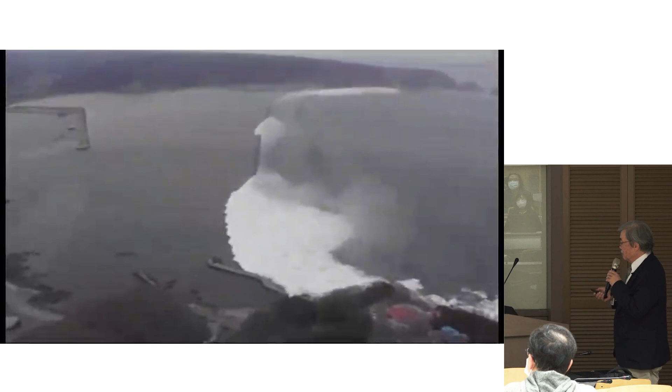This short video was cut from a much longer original, taken during the 2011 tsunami in Japan, in the Bay of Kuji, showing again that the leading wave of the tsunami looks just like a bore, like the Qiantang River bore propagating, with a very, very long crest. Practically it looks like one uniform long crest, and it's obviously breaking because you see air bubbles trailing behind the wave front.

And I think the video will stop pretty soon. The length of this bore is very, very long, extending a few kilometers, extending across the whole bay. Another thing I should point out is the breakwater, which is protecting the harbor behind it.

The height of the seawall typically would be 5 to 10 meters—I don't remember exactly what the height of this particular one is—and overtopping can be clearly seen here. So that gives you some estimation of the height of this wave as it propagates into the bay. It's quite high, 5 to 6 meters, as we estimate elsewhere.

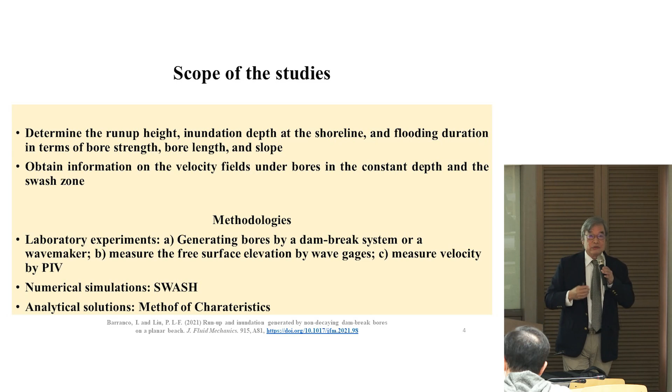In this case, we use an open source model called SWASH, which is a non-hydrostatic shallow water wave equation approach. I won't give you the details now, but I'll say something about it later. Then, in some situations, we can take advantage of essential information based on analytical solution methods, such as the method of characteristics, when you have shallow water wave conditions. A combination of these will help us reach the conclusions or information we want.

As Professor Yu says, I've been at the National University of Singapore since 2015, and when I went there, this wave tank was already there. So the first thing I did was install two pieces of equipment.

One is a so-called dam break system. I don't know whether you can see this, it's too dark, but basically it's a vertical gate that you can lift up very quickly using an actuator system, and you can control the motion if you want. But for our purpose, we simply pull it up as fast as possible. It's actually a little bit dangerous, you have to control it carefully. That's the dam break system.

The idea behind the dam break system, or dam break terminology, I think everyone knows what that means, is that you store water behind this gate to a certain elevation. We call it a reservoir, pretending that's a reservoir, and the gate is pretending to be a dam. We break the dam so the water gushes out and forms a bore in front of it.

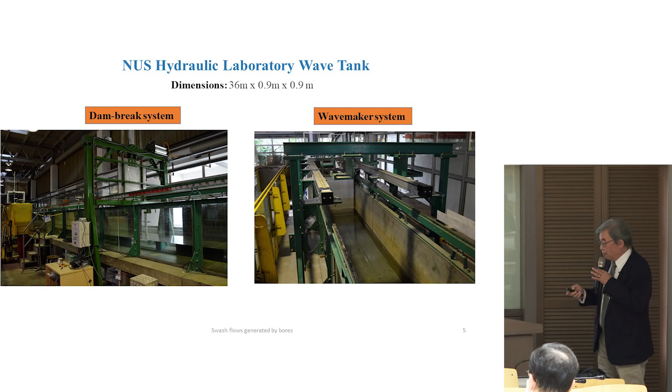So these are the parameter variables that he used, these are the numbers to vary from relatively short bore length to relatively long. The longest one is almost 18 meters long, which actually extended the whole length of the wave tank.

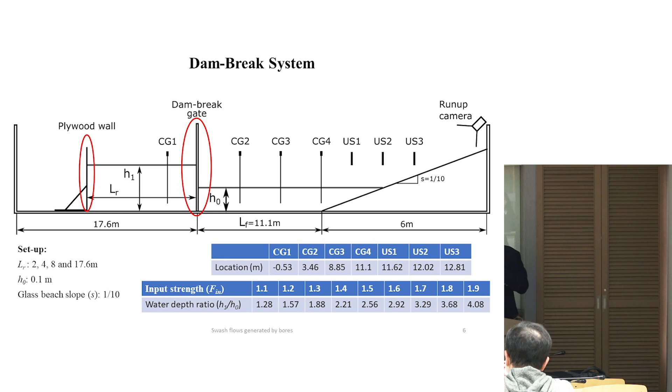Then he measured a couple of things. He used wave gauges to measure the free surface elevation, time history of surface elevation in the constant water depth region - these are the traditional capacitance wave gauges. Then we have ultrasonic acoustic wave gauges on the slope. This is a 1/10 slope, it's a glass slope, so it's a very smooth surface - we're not really looking at rough surfaces at all. It's a very idealized situation, a planar beach with one slope. In the real situation it's definitely not like this - you have more rugged terrain. This is just an approximate situation.

Then we also have another setup - the wave maker system. The total distance the bore can propagate is relatively long now, about 24 meters from the end of motion of the wave maker. Remember, the stroke is about 5 meters long, and of course we can control it - it can stop at a different stroke, giving different lengths of bore. You can also accelerate the bore at different speeds, giving different strengths of bore. So you can control those parameters to generate different kinds of bore.

Also, you can control the water depths. Here we simply use a 15 centimeter water depth, same beach. For the wave maker experiments, we not only measure the free surface elevations and run-up inundations, but also use PIV methods to capture the velocity distributions in the field of view, in the vicinity of the still water shoreline - that's the intersection between the water surface and the beach surface without waves. We'd like to see what kind of inundation depths and velocities can be captured in this vicinity, plus independent measurements of the run-up height on this beach.

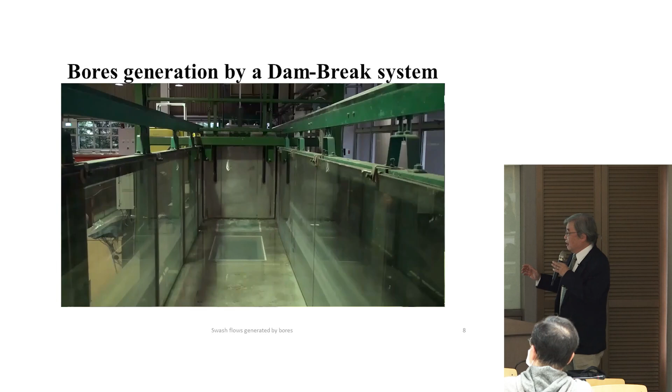Very simple, right? And this is another view, and you see this breaking bore gushing out and moving toward the beach. Then what happens is this bore will climb up the beach and break at the same time, reaching the maximum height. I'll show you some pictures later on.

All right, so this is a dam break system. Here is the wave maker, looking toward the wave maker down the channel. You can see the bore being generated, massive water being pushed toward the beach. The bore front has a lot of breaking, a lot of air bubbles entrained, so on and so forth.

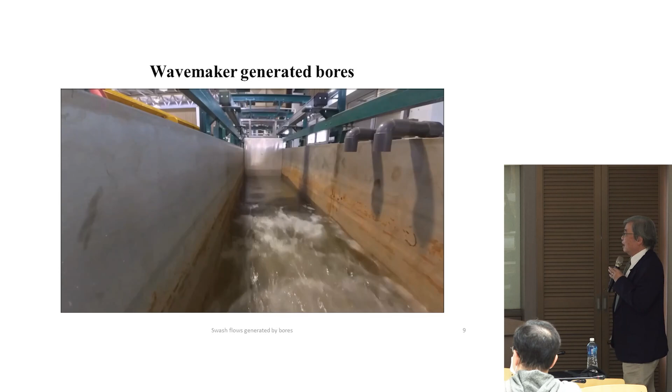You can also notice that our tank is kind of old, maybe 30, 40 years old. Certain parts are made of steel plate and kind of rusty. So it's not a perfect experiment, not squeaky clean experiments. There's always a little uncertainty in the data, how about the accuracy.

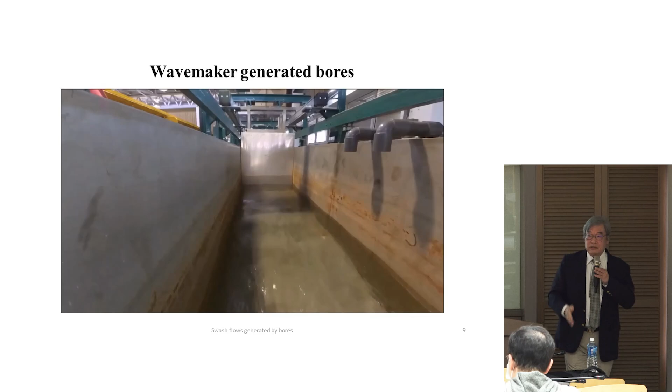Then certain portions, fortunately, have a glass panel, so that allows us to do some visualizations and measure the velocity field using PIV, so on and so forth. And there's a bottom, a false bottom we can take out, and we can put a laser, generate a laser sheet on the bottom shooting upwards to get information, taking images.

Okay, so here comes the 1/10 slope now. The first one is a long breaking bore coming in. You can see the front coming through. Then the water just keeps going up, then stays there for a relatively long time, and then goes down.

You see the unique feature is that because the bore length is pretty long, during certain time intervals the surface elevation is almost quiescent, just stays there. The area remains flooded for a long time, then the bore retreats. So tsunami is like that, okay?

Because there's a huge bulk of water coming through, the bore front has already moved inland, maybe a kilometer upstream, but near shore, near the coastline, the water depth was still at a certain height and remains there for maybe 10, 20, 30 minutes, because the typical tsunami wave period is about 20 to 30 minutes. So the water floods that place for a relatively long period of time. That is a long wave, a long breaking wave.

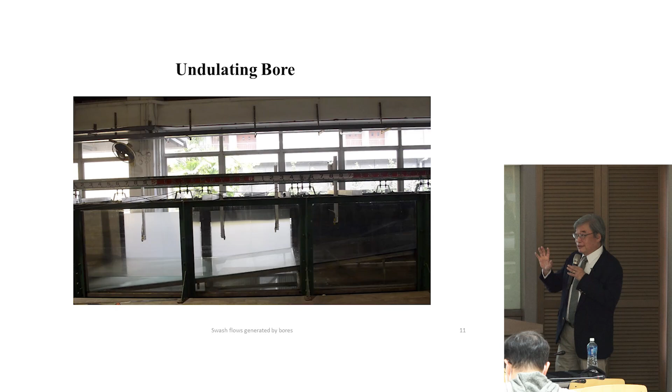Okay, these are the most interesting part of my talk. And the rest of it is going to be relatively boring. No, hopefully not. So anyway, the idea is that we're interested in looking at such a phenomenon.

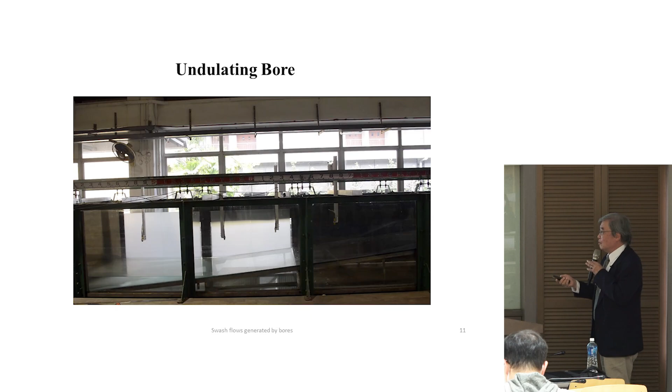We think we scale the problem correctly, looking at the so-called breaking bore and also undulating bore, the differentiation between them. Physically, characteristically, they look different, but really the parameter-wise it depends on the so-called bore strength. And bore strength has to be bigger than a certain number, I think 1.4 or 5, then you will switch from undulating bore to breaking bore.

Here we go. As I mentioned before, tsunami actually in the ocean, the real world, is a very long wave. The typical tsunami could be in the order of magnitude, length of a tsunami could be on the order of 10 kilometers or even longer. A very large tsunami could be 100 kilometers long in the ocean.

It becomes a little bit smaller when they propagate into shallow water, especially in the coastal area, but still very long in terms of kilometers or tens of kilometers. And the wave height, typically even for a large tsunami in the ocean, in deep ocean water depths typically 3, 4, 5 kilometers, the wave height is only about a meter or two.

So the wave height of a tsunami, or bore, compared to the water depth is very small, and compared to the horizontal length scale of the bore is even smaller. So tsunami is actually a pretty innocent type of wave in the ocean to us, to the wave theoreticians. It's a linear shallow water wave, or linear long wave, the simplest kind of wave you can get. And they typically don't even break in the ocean basin.

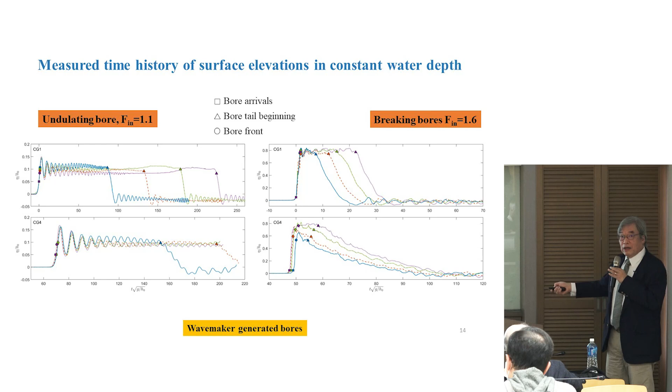For the wavemaker-generated bore, we were able to create another type of bore, which is a decaying bore. That means after the so-called breaking bore, when the bore crest becomes zero, if you let the bore continue propagating, the bore strength will actually decrease, and the amplitude is still going to go down. Because the shallow water wave equation theory is really developed with a finite bore length, in this case you can see this is actually a decaying bore already, and the amplitude starts to drop, and the bore length clearly becomes zero — you cannot define it very clearly.

Here's just a quick check. What I'm showing here is the input bore strength, for the dam break problem. You can measure the bore strength by measuring the velocity and water depth, and so forth, and calculate the input bore strength. Remember, we have different wave gauges along the channel at different locations, and between gauge 2 and 3, we can use the data to calculate the local strength of that bore.

Plotted in this figure, if the bore strength at this location is the same as the input bore strength, which according to the method of characteristics should be at 45 degrees, all the symbols are the actual measurements. This gives us some comfort that our lab is probably not too bad. They don't scatter everywhere, and they agree with the method of characteristics result to a great extent — the R squared value is 0.919, really good and close for this set of experiments. This also gives us insight that our setup really is in the shallow water wave regime.

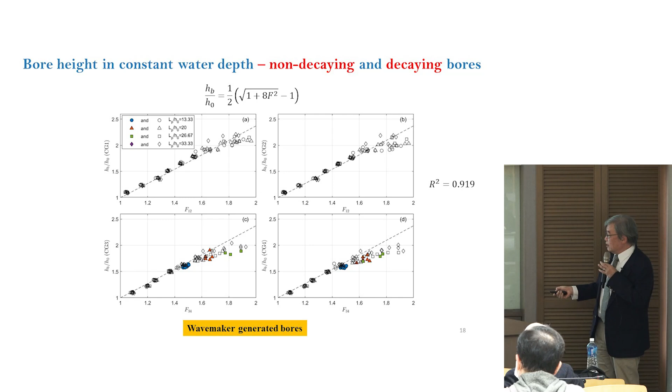So this is for the decaying mode, and the formula shown here is simply for the non-decaying mode. When you have a decaying mode, they start to deviate from the 45 degree line. All right, so let's move on—that's for the constant depth regions. Now we're moving to the core of interest.

Actually, it's the flooding—it's about the inundation and the run-up. So to define clearly what I mean, run-up means that even with a very rugged beach profile, the tsunami coming in is going to rush up inland and reach the maximum highest point vertically. That's the vertical distance measured relative to the mean sea level, or still water level, in our laboratory experiments before the tsunami comes.

There is a still water level here, and that's the so-called run-up height. Now this location here is what we call the still water shoreline—without a wave, water is not moving, and it's the intersection between the still water surface and the beach profile. That's my definition of the shoreline when it's still water. Remember, our measurement for the field of view is around in this vicinity.

So the inundation depth, the water depth here, is measured from the free surface location to the bottom beach profile—that's the so-called inundation depth. Later on I will show you right at the still water location. That's two physical parameters I'm going to show you.

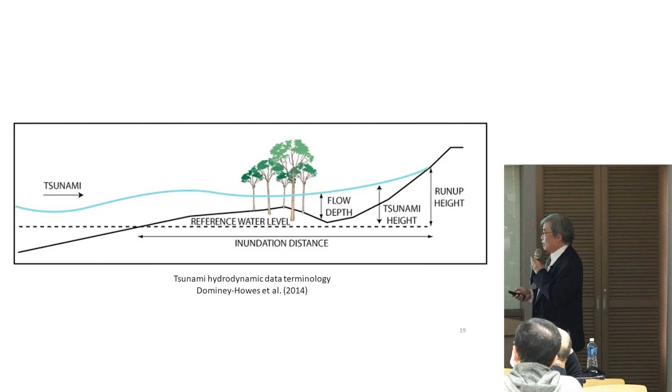Another thing is the duration. If you still remember the video I showed you for the very long crest bore, the free surface will stay almost stationary for a long time. So at a given point here, during that time period, water depth is staying constant for a period of time. That's our definition of the flooding period. We can measure that, quantify that, and find out what is the relationship between those three parameters: inundation periods, inundation depths, and the run-up height in terms of the input data.

That means in the reservoir case, will be what? The strength of the bore, the length of the bore at the generation region. The wavemaker is a similar thing. Okay, so again, this is a little boring, but I have to show you.

This is the inundation depth at the stillwater shoreline for the non-decaying bore for the dam break. The characteristic hasn't really changed that much. For the undulating bore, if you recall, in the constant water depth you have oscillatory behavior, undulation, then it tapers off with constant water depth, then decays.

Now, the only difference is that I think this is because the first wave started to break already. This is at the stillwater shoreline, so the water depth there is zero at the beginning. When the bore comes in, even if it's an undulating bore in constant water depth without breaking, by the time you get to that point, it's broken already.

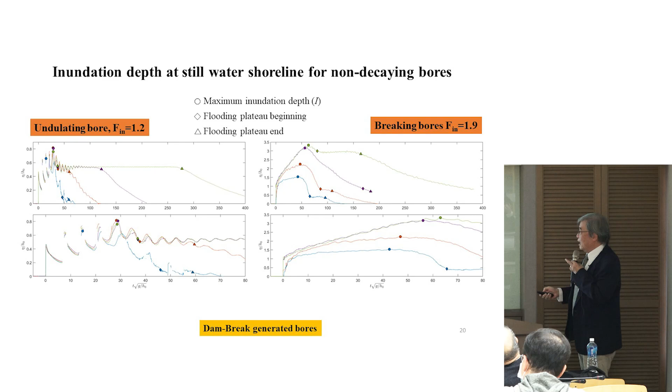Okay, so on the right here is a breaking bore. Again, this front is very sharp, or relatively sharp. Of course, the scale is distorted a little bit. So, relatively sharp, there's a lot of bubbles, dissipation going on in the front, but you still can identify it, in some cases very clearly. Some of it is a little bit challenging to define - how do you define the wave, the crest length? But this is the features.

Now, similar characteristics when you have a wavemaker generated bore - this is the undulating bore, this is the breaking bore. One thing interesting in some of the cases is these undulations actually persist for a pretty long time throughout the entire process. These are kind of high oscillations. I'm not so sure whether that's real or not. I think it's real because this is a relatively high frequency kind of oscillation.

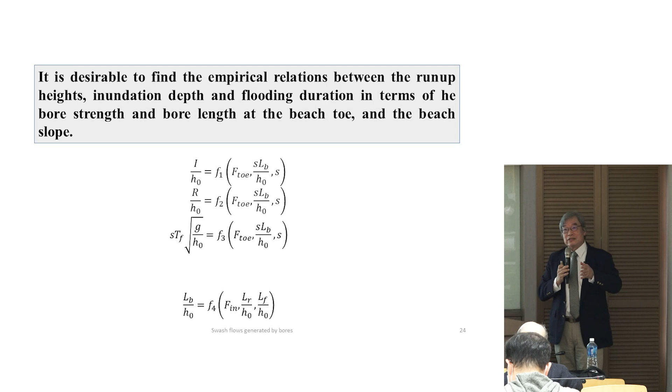This is equivalent to saying, if you're interested in periodic waves, you're just interested in the run-up—same question. You want to find the relationship between run-up, inundation depth, and duration of flooding for an incident periodic wave. So you want to specify your periodic wave incident condition. Where's a better location to specify? At the toe of the beach, especially in laboratory experiments such as this.

But unfortunately, what we've measured so far is the information at the reservoir length. So we need to convert that. That's all I'm saying here. We want to derive a relationship between the inundation depth, run-up, and duration of inundation in terms of these three dimensionless parameters.

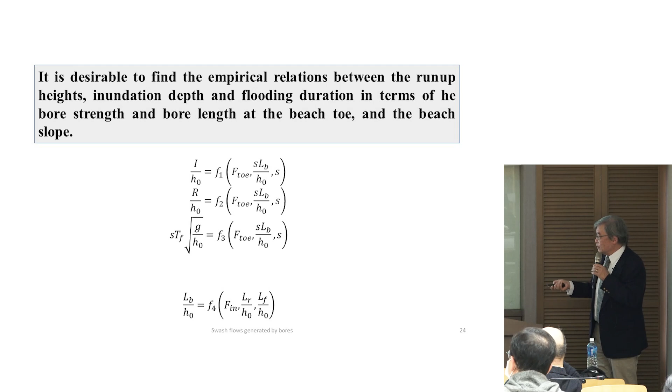There may be nothing else to consider, but the wave length LB can be written in terms of the reservoir length through the method of characteristics, because we've demonstrated that the method of characteristics is a good enough theory to explain the process in constant water depth.

So we simply want to find the relationship between the gate and the toe, or the wave maker to the toe. Before I show you the final results, in the lab experiments, as I mentioned before, we only selected a set of parameters to do the experiments. So the data, although there's lots of it, doesn't really cover the whole range, especially the slope—we only have one slope, 1 on 10.

So we figured that if we build another beach, we can do it, and now Ignacio will never graduate. That would also be a pretty tedious thing to do. And there are better things to do than repeating that kind of experiment.

So we figured the smartest thing to do, perhaps, is to combine the laboratory experiment data with numerical simulations. Maybe somebody will smartly say right now, why don't you just use a numerical solution directly? Frank Young will say it—this is all BS, why don't you just use the Navier-Stokes equation?

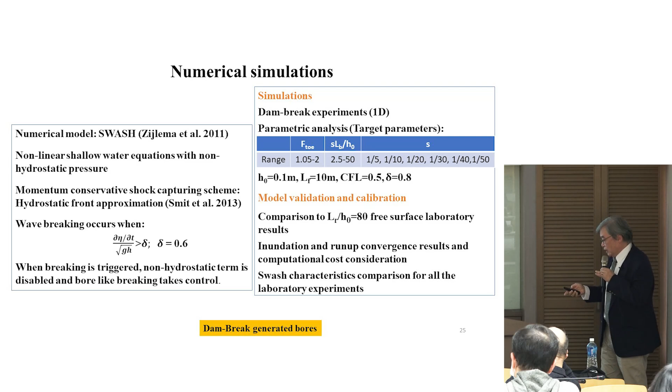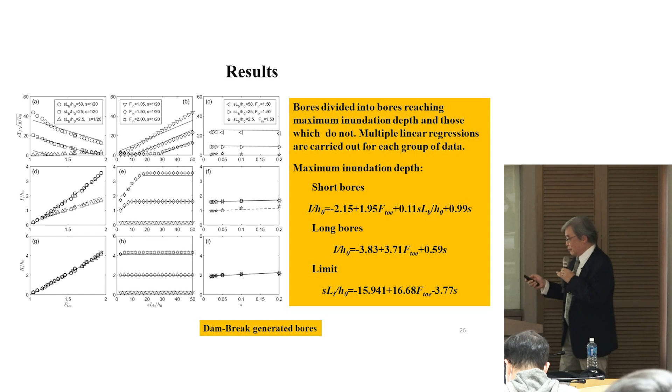Okay, so again, this is only for the dam break problem, and the interesting thing is that the run-up height is independent of wave crest length, crest to crest length. The run-up height only depends on the bore strength at the toe and the slope.

This is sort of equivalent to a hypothesis we made: for a generated tsunami waveform, the maximum run-up height really depends on the waveform characteristics more than how long the tsunami will last. We've done similar analysis using, for example, the solitary wave and so on.

The next formula is for the duration. Again, duration also somewhat depends on the bore length, as shown in this figure.

This is the case when we use the so-called wavemaker generated wave. Look at this, it's probably a little easier to see for the run-up height. This line here is the empirical formula we found, based on the dam break problem.

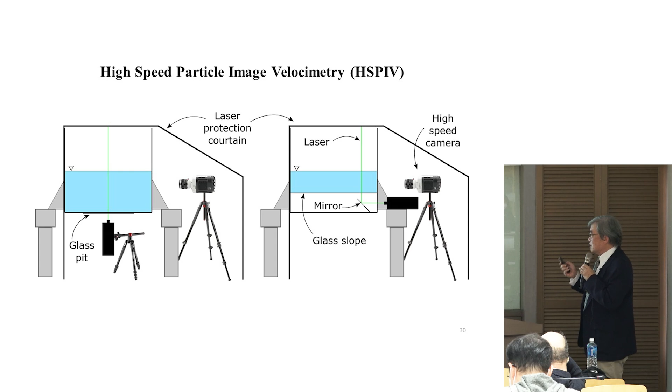So we set it up. This is one point I want to make: PIV sounds like a fantastic method, but it has a lot of issues. One bottleneck issue is the bubbles.

For the undulating bore, there's no bubbles, and it's pretty nice. If you have adequate particle seeding, then a high-speed camera with proper lighting can give you very accurate measurements.

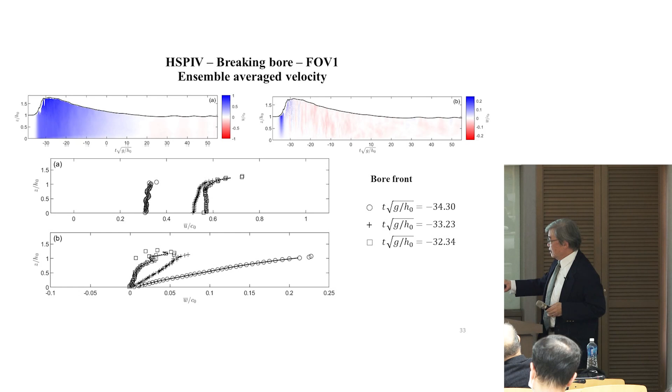Here it's more dramatic, so horizontal velocity is almost uniform. This is almost just before the wave comes, then suddenly it pushes up because the bore comes, and becomes even bigger near the free surface, because of this steep front - the surface near the top moves faster.

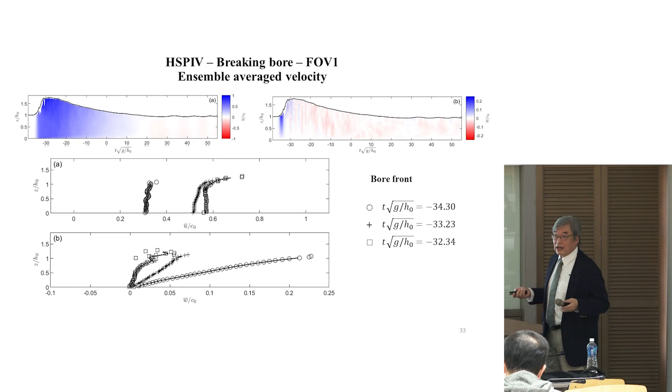Then the vertical velocity again, for the most part, is still a linear function in the entire water depth. Again, even with breaking or that, still a long wave, so the behavior still remains more or less the same. The data, of course, becomes more scattered near the surface because of breaking and the inaccuracy of our PIV data. So these are all PIV data analyzed based on PIV data.

So we can go on to later - this is later time, moving down near the back of the crest of the bore and to the tail end of the bore. During a certain period of time, you notice this is between minus 30 to minus 25. Minus 30 is almost here, minus 25 is here, near the crest.

You can see that they are almost uniform in the x direction, like a uniform flow moving toward the shore. It's really amazingly close. On the free surface, of course, it's a little noisy because the breaking is still going on, but underneath it, they're almost collapsing into uniform, homogeneous velocity behavior. The vertical velocity becomes very, very small near the bottom as you move toward the end. Again, I don't even know how accurate these are because of noise, but anyway, this is an honest ensemble average velocity out of the PIV data.

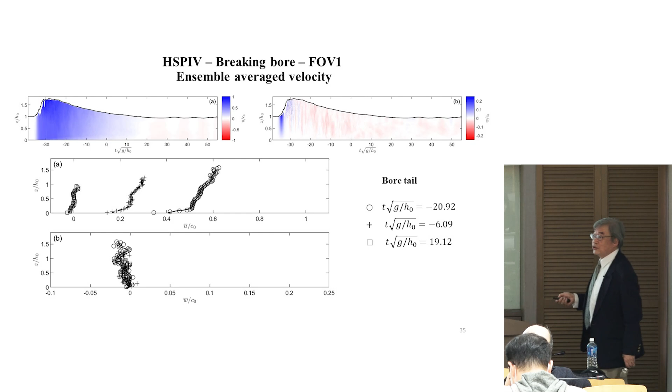Toward the tail, the velocity starts to decrease, retreat, and in fact starts to reverse itself because of downrush, coming back I guess. Vaguely you can see the boundary layer behavior, although we didn't pay too much attention to it - we simply took a field view covering the entire water column. I suppose if we really wanted to study the boundary layer behavior carefully, you could zoom in there and figure out the velocity boundary layer behavior.

Again, vertical is very small and also practically the same. This is toward the tail end, from minus 20 all the way to 19, I jumped quite a big distance. But as far as the vertical velocity is concerned, nothing has changed that much during this period of time.

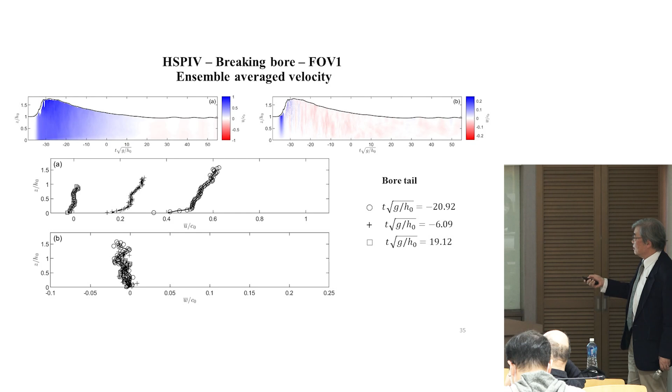Now the turbulence field, some of you might be more interested in it, but to be honest, we're still looking into this very carefully. I probably cannot make that much of a conclusion at this moment, but this is a rough distribution of the turbulence components in the horizontal direction versus the vertical direction.

And again, the magnitude, you notice that is a different story now. The magnitude of horizontal velocity, this is turbulent velocity, turbulent velocity intensity, so it's U prime. U prime is when you do the Reynolds decomposition: U equals U mean ensemble average plus U prime. U prime is the turbulence fluctuation. Then we take a square and do another ensemble average, take a square root of it. The message here is that, roughly speaking, not thinking about detail, just looking at the rough features, they are pretty much the same, right? The order of magnitude - remember, in ensemble average, horizontal velocity is dominating, but turbulence is a different story.

Then this is another representation, using the same data, looking at it a different way. Turn it around, up and down, and look at it, trying to understand what's going on.

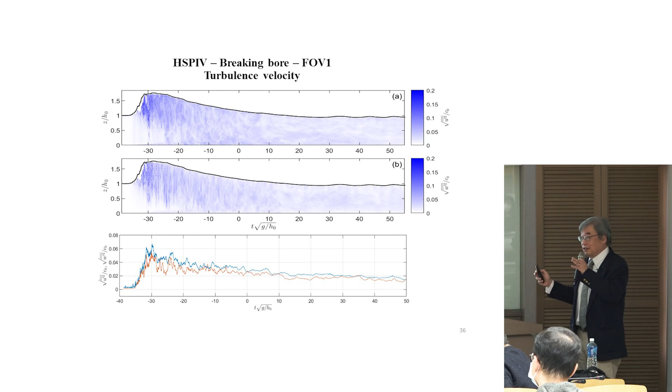What do you guess? I think horizontal probably is still a little bigger, then the red one probably is the vertical velocity. I honestly don't remember now, sorry for that. But they are close enough, with similar features, and they follow the same pattern. There's no obvious phase lags and so on and so forth. In some ways, pretty boring, but that's the way it is.

You would like to see something spectacular happening, and then you say, wow. Yeah, right. Anyhow.

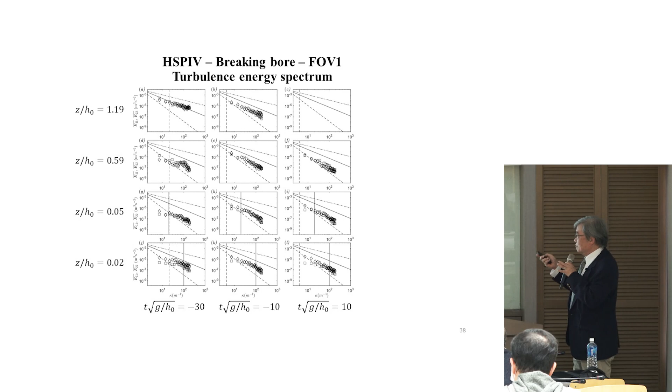You're simply checking whether this turbulence field is within the so-called inertia range or outside, or whether there's an exchange between the boundary layer characteristic or the free surface breaking. Stay in tune, we're doing further analysis on this kind of thing.

So moving to the near shore, let me use another 5 minutes. I will just conclude it, and just show some pictures about near shore in the still water.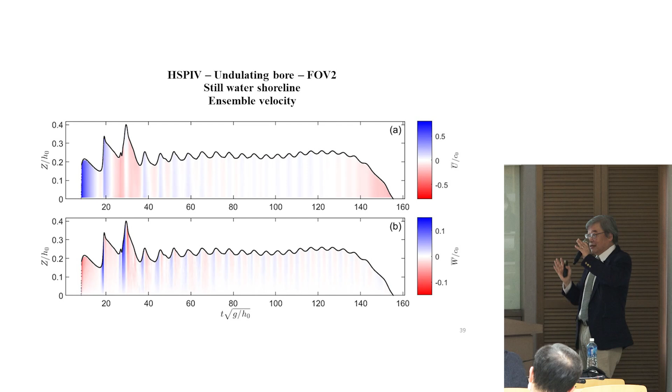I use a capital because on the slope, when I measure the PIV, the U is along the slope. Capital U is along the slope, so it's rotated, okay? It's a rotated coordinate system. W, capital W is normal to the beach. So the coordinates are rotated a little bit, so this is not exactly horizontal velocity.

It's a velocity along the beach surface. And it appears that the vertical velocity gets stronger—not stronger, but there's an alternating change of directions. It's from red first, then to blue. So there is some kind of complicated flow pattern happening around here.

So these are again the profiles, still in very shallow water wave. This is even shallower, and I think the behavior still persists. You have very uniform horizontal velocity in the water depth, and then more or less a linear shape of distribution for the ensemble average velocity.

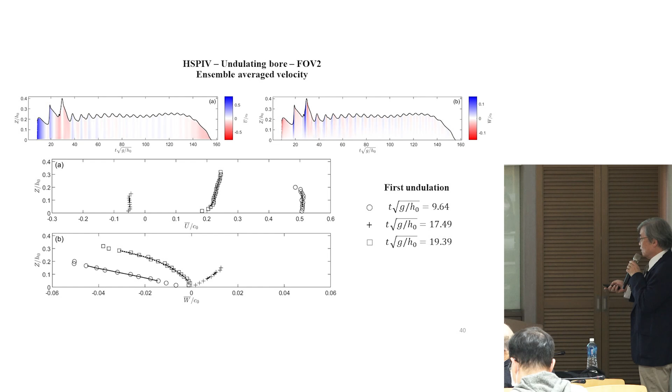I think to complete the analysis, we actually have to go back and look at the ensemble average velocity patterns. I think there's some kind of interaction between the first three waves in some sense, to generate these kinds of features. And I reserve the right to revise everything I said.

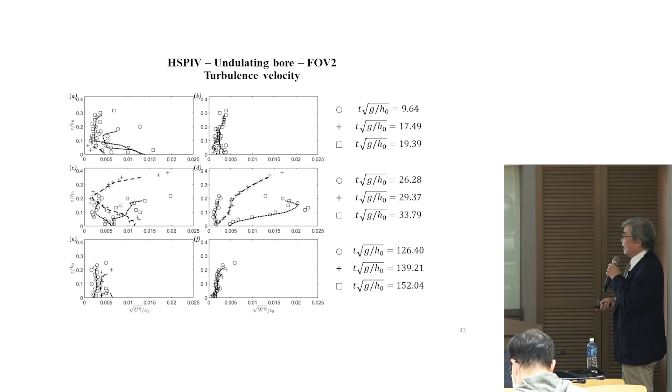Similarly, you can measure the turbulence characteristics. Now, instead of boring you with this, I'll just show you some of the results. Flip through it—this is for the breaking bore.

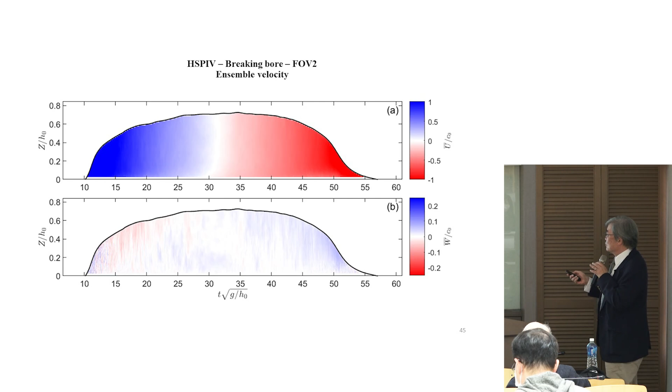This is very interesting, very different from the undulating bore process, right? It's almost symmetric, with a positive on one half and a negative on the other half. It's basically uprush and downrush, that kind of process. Then the vertical velocity is much smaller, at least one order smaller, for sure.

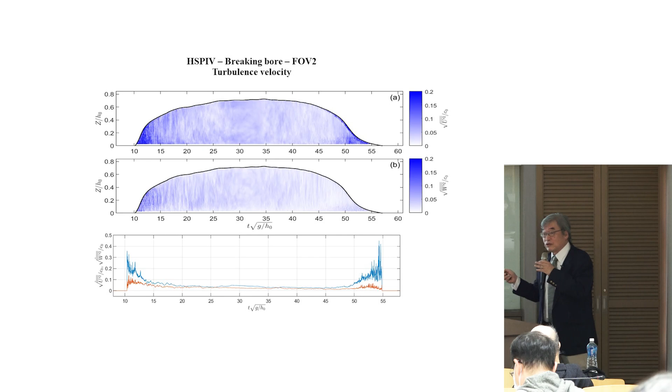Again, the velocity distribution in the water column is pretty uniform in the horizontal direction, and then the turbulence distribution during the whole process in this case is clearly dominated by both ends—one is the uprush phase and the other the downrush phase generating this turbulence. In this case, I can tell you the blue one is definitely the horizontal velocity component, and red is the vertical component, so there's significant difference.

Okay, I'm not going to talk anymore. Conclusion—if you still remember what I said at the beginning, then I shouldn't need to read this, all right?

But basically, we did it—he did it. My student Ignacio did a very comprehensive study of the whole subject, including the measurement of surface elevation characteristics of a breaking bore and the undulating bore. That means the surface features, the inundation depth, and also the run-up height. And then he showed the dependency of the run-up, the inundation depth, and flood duration in terms of the incoming bore characteristics, namely the strength of the bore, the crest length of the bore, and also the slope.

And the important message here, if nothing else, is that for some reason I'm totally convinced that the run-up height, even for the real tsunami case, is really more determined by the incoming wave shape, the front. The crest length really doesn't play such an important role. Of course, in the real tsunami case, the three-dimensional geometry and bathymetry play a role that will rule out everything I said. Now, so then of course we try to understand the velocity field.

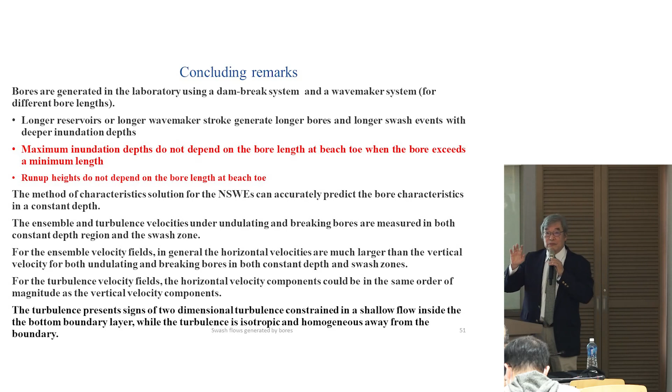I think the message there really is that the shallow water wave passes through, and then in the turbulence—if we look at that data more carefully—there's a sign showing that in most areas this is like a two-dimensional turbulence field, because of the shallowness of the water depth. Also, most of the turbulence strength is more or less pretty isotropic in some sense.

Okay, so lots of information. I don't know whether you can remember anything, but hopefully you will remember some of it.

But if not, there are articles you can find—part of my student's thesis, published in JFM not very long ago. That's the first part of it, using the dam break problem, which establishes a relationship between the run-up height and the incident bore conditions. The second part is the measurement of the velocity field and looking at some of the wavemaker-generated data more carefully; that's still under review. Fingers crossed, it will be published soon. If you are interested, send me an email and I will send you a copy. All right, thank you very much.